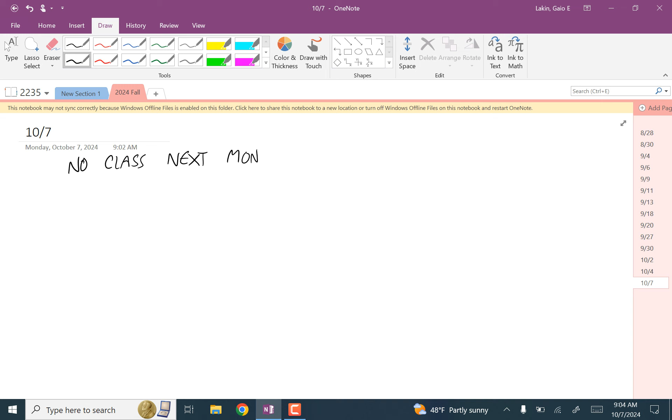One thing I'd like to remind you, maybe especially true in thermo, but in both classes, for these daily assignments I'm giving you half the solutions. So when you go through problems and aren't sure you did it right, please ask me in class and we'll go through it. I'm planning on a chunk of this class being spent going through those problems. And I guarantee questions you have about a problem, other people have questions about it too. So don't worry that everyone's thinking 'oh my God, couldn't do number 7.' Maybe some people aren't nice, but a lot of people aren't thinking that way.

Okay, let's do, well, does anybody have any homework questions? Okay, let's do one more distributed load example problem.

I get number 7. Did I tell you about a friend of a friend who was teaching math at a community college in Michigan somewhere? A person came into his office hours and said, 'I can't do number 7.' He's like, okay, can you show me the problem? The student said no, it's not about this assignment, I can never do number 7, no matter what book, what assignment. And the guy said, 'you can skip number 7s.' That solved the problem.

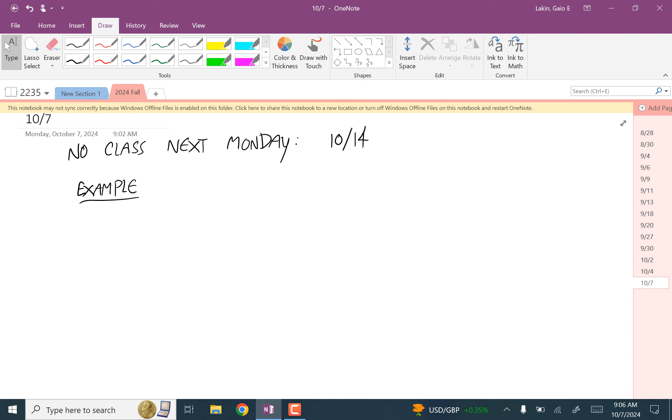Okay, yeah, I have a question. About a distributed load. When it comes to finding the X component, does it matter what you use for the triangle? No, it doesn't matter at all because all of our distributed loads are acting straight down. Actually, it's hard for me to imagine a case where that would be relevant, even if the things were acting to the side.

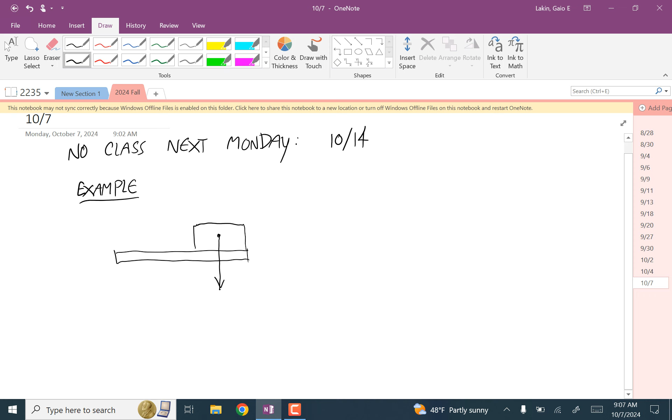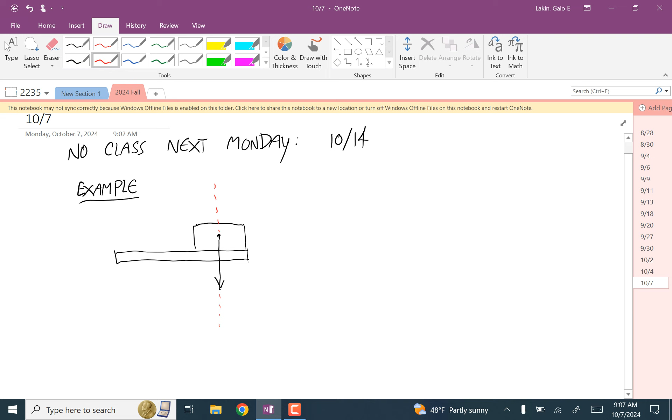So if you have a distributed load like this, and the centroid of that shape is here, this distributed load is acting straight down, which means the line of action is this. So you can move that to any height without it affecting the problem. It's an equipollent system no matter what height you put it at. So no, it doesn't matter.

Does it also change depending on how you define your origin? Well, then based on where your moment point is, you might have to adjust. So we're going to do one right now where you have to fiddle with that a little bit. Let me set that up.

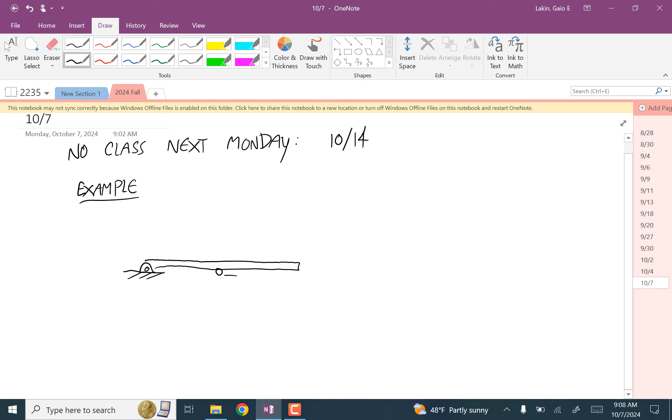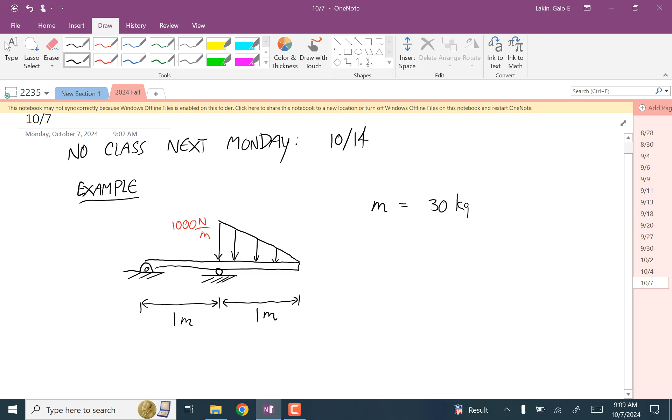So let's say we have a beam, and our distributed load looks like this. Let's say this is 1 meter, this is 1 meter, and the maximum value of that distributed load is 1,000 newtons per meter. And let's give it a mass too, say 30 kilograms. We want to calculate those reaction loads. So, free body diagram.

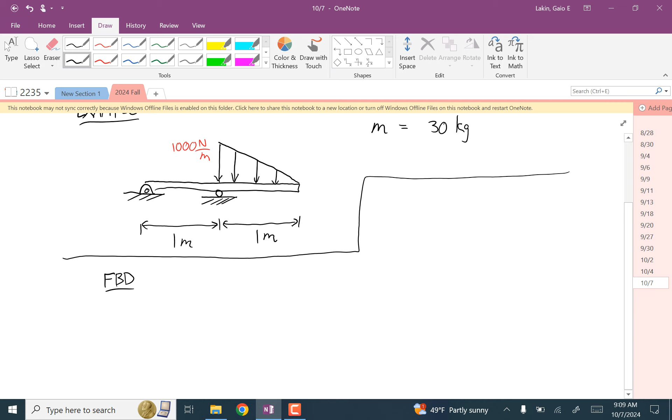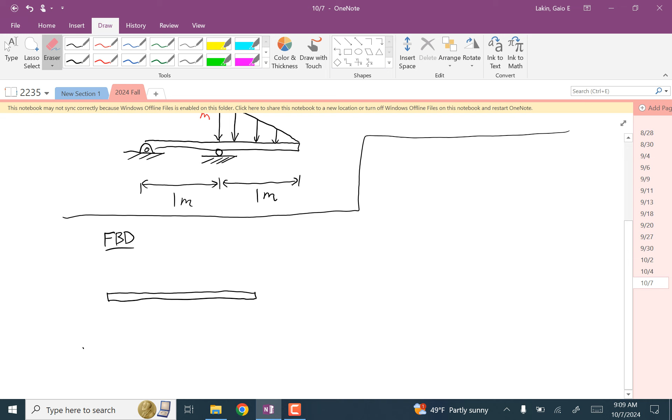At the pin joint on the left, we have a force vector, I'll call that RA. At the center, at the roller, there's an upward force, I'll call that RB. There's a weight acting at the center of mass, that's 30 times 9.81. And then we have this distributed load. And that's a complete free body diagram.

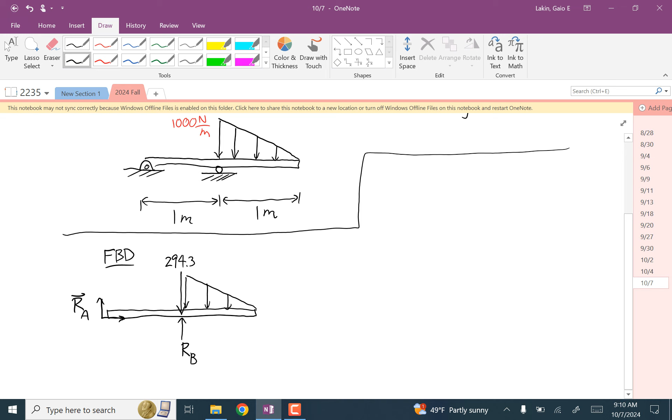So now let's treat the distributed load like a point force. Okay, so we got this triangle.

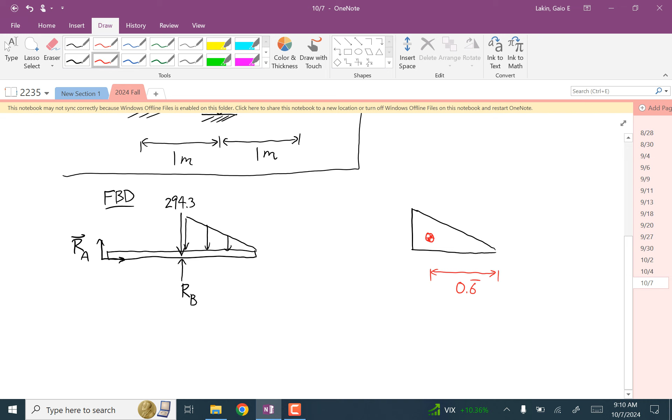The centroid, we don't care about the y location of the centroid, but we know that the whole length of this triangle is 1 meter. So we know this is 2/3 of 1 meter from the point side, so this is 0.6 repeating to the centroid. And we know that the area of this triangle is the height times the base divided by 2, so 500 newtons.

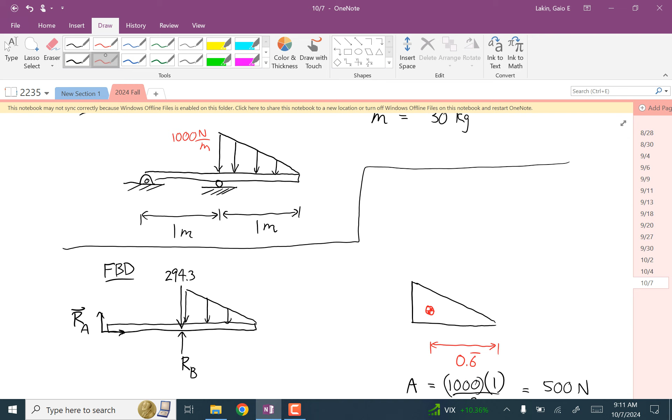But now, like you were just asking about, we know that the distance from the end is 2/3 of a meter, but that's probably not where we're going to put the about point. Let's put it over here, that's where we normally would, and so now we're going to just have to do some subtractions and stuff to figure out what that is.

We know that this distance is not drawn to scale. This is 0.3 repeating. Okay, and so to get from the about point to here, it's going to be 1 meter plus another 0.3.

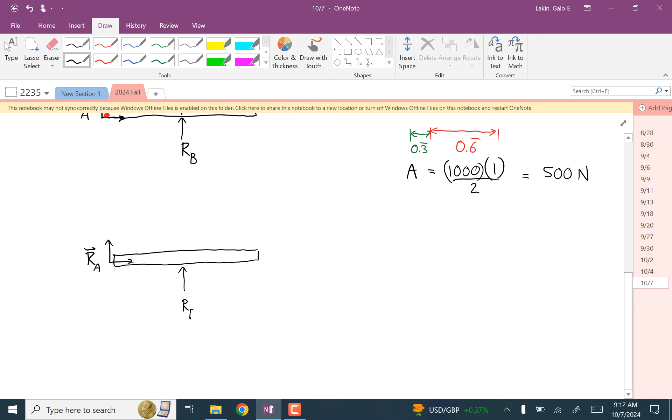And so this free body diagram looks like we have this force vector RA, this is RB. We have a weight force of 294.3, and then we have a downward force here of 500 newtons. And this distance is 1.3 repeating.

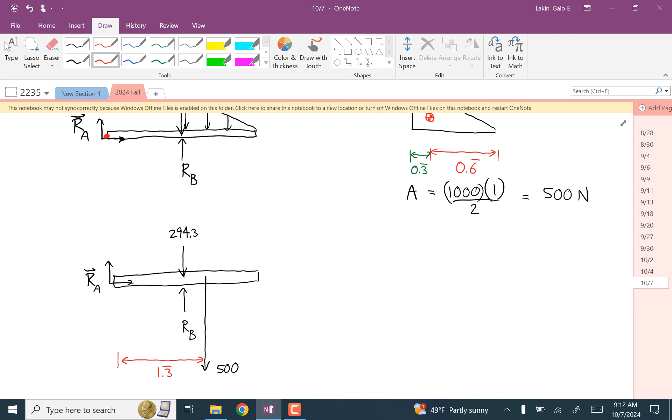Okay, so once you figure out where the centroid is inside of that shape, you're going to have to use that to figure out what the distance is from whatever your about point is. Now at this point, you always can write out a table, and I think it's safe to say that in this class on tests, you'll have time if you want to go through the table, that's fine. I tend to think of these horizontal beams just in terms of distances and stuff, so I guess that's what I'm going to do here.

So Newton's second law says RAX, RAY plus 0, negative 294.3 plus 0, positive RB plus 0, negative 500 is equal to zero. And so right away we know that RAX is 0, there's nothing happening horizontally there. And then the second equation says RAY plus RB is equal to positive 794.3.

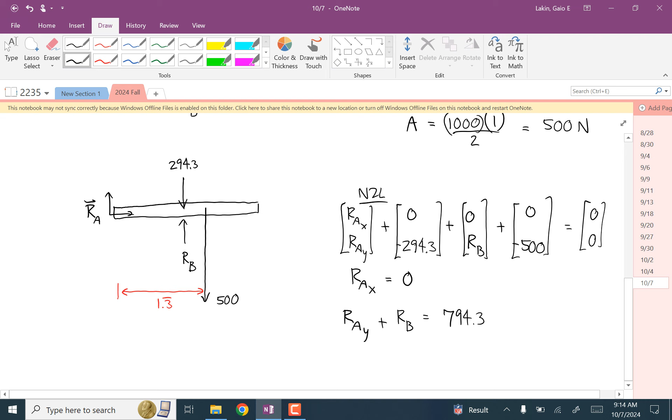And then the moment equation, my about point is here, so we have nothing from the force RA. It's 1 meter from the about point to both of these two, the 294 and the RB, so we have plus or minus 1 times RB. That's drawn positive, so would a positive, upward force RB make this rotate clockwise or counterclockwise around that about point? Counter, yep, so that's positive.

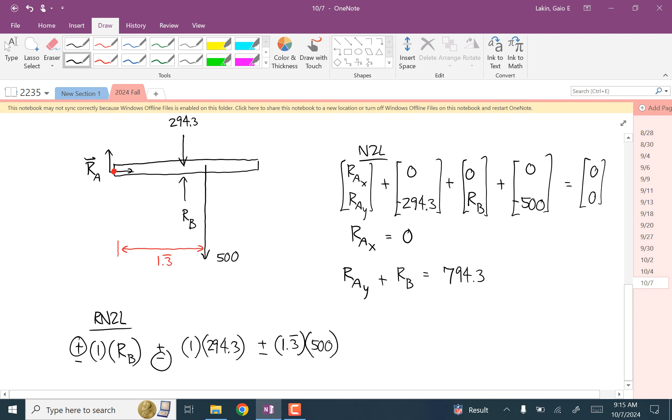And then we have plus or minus 1 times 294.3. Would that downward force make it rotate clockwise or counterclockwise? That would make it rotate clockwise if you're just imagining it rotating around that hinge, and so that's negative. And then plus or minus 1.3 repeating times 500. Would that downward force make it rotate clockwise or counterclockwise? Clockwise, so that's also negative.

For RB, is there any benefit to not always trying to figure out which direction it should be going, just always pick positive according to the coordinate system? It is kind of helpful to do that. And later on, when we're doing internal loads a lot, we're always going to put it all the way at the left like that. So can you say that again? Put what? I'll put the... Just always, I think what you're asking is always put the about point at the far end like that. No. Oh. When you're trying to figure out which direction RB should be going, just always pick positive, and then if it's negative, it's going in the opposite direction of the coordinate system.

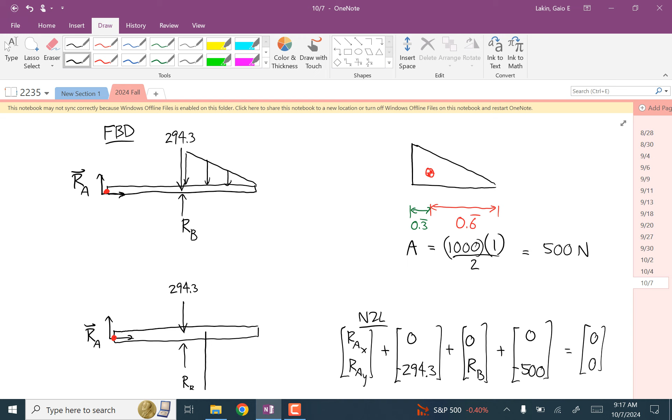RB? Yeah. Did you say like whether that's going up or down? Yeah, when you're trying to figure out what sign it should be, just always pick positive, and then it's matching the coordinate system, you get to just use whatever sign you want. I would say, I mean, that's a roller, and a roller is just always pushing towards the body, so that's how I know that it's going that way. And so then I know that this answer should be positive.

I know that the sign should be positive. I would always do it that way because there's no reason rollers always have to be on a horizontal surface like this - they can be going any direction. So I would just always make it a pushing force toward your chosen body, and then the signs fall wherever they are.

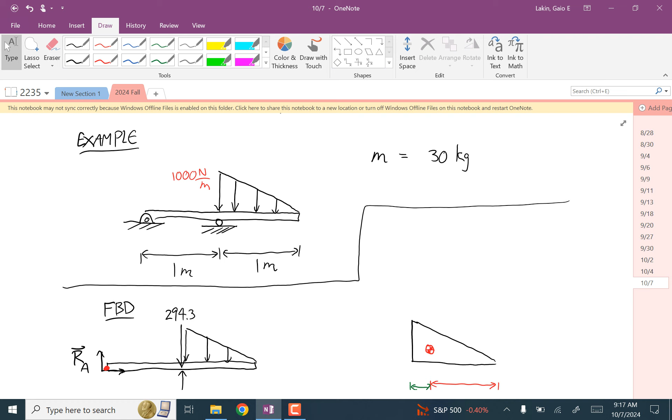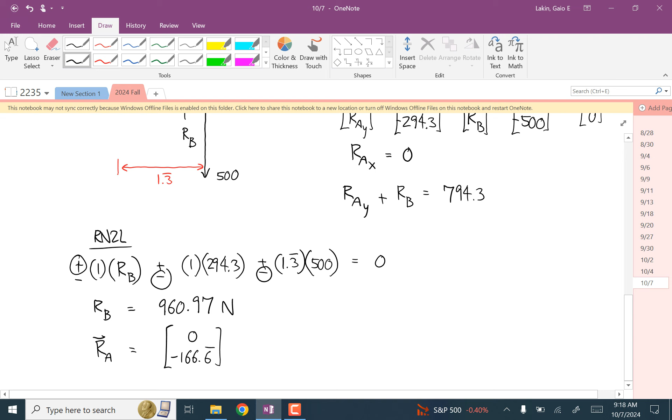Okay, so we got RB, and RA then is equal to 0 for X, and 794.3 minus 960.97, so negative 166.6 repeating. Okay, any questions about that?

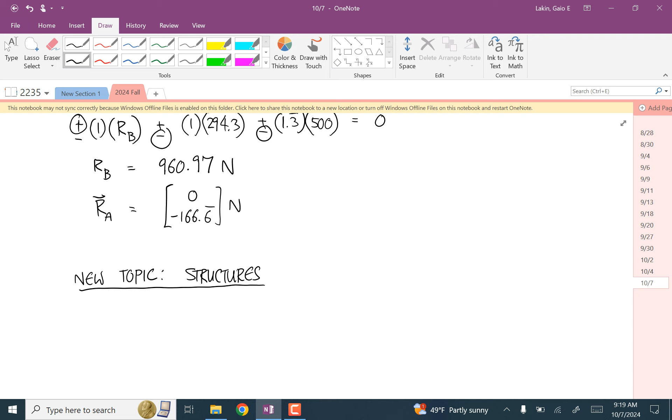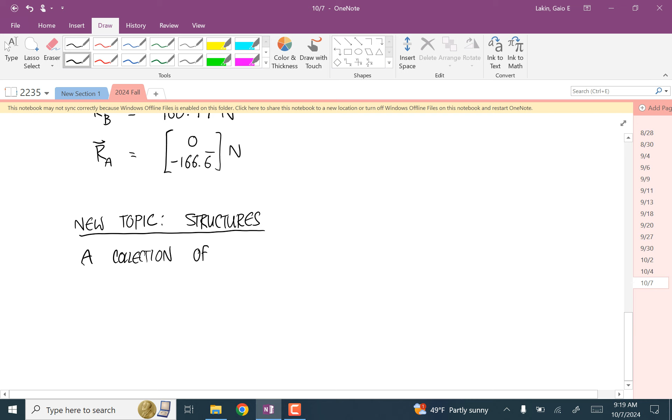Okay, so now we're getting into a new topic, and I consider this to be the heart of this class, the most important topic in this class. This is structures. So now what we're going to do is go from individual rigid bodies and calculating reaction loads to collections of rigid bodies connected by joints and calculating all those reaction loads. So this is a collection of rigid bodies connected by joints in static equilibrium - that's the definition of a structure.

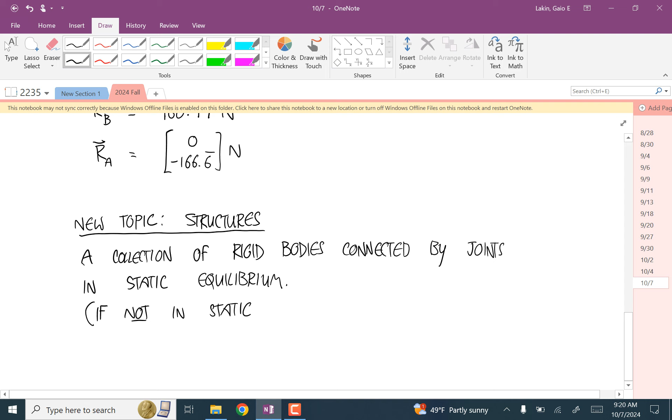So in parentheses, if it's not in static equilibrium, then you're not doing statics anymore - then it's dynamics. And the collection of bodies is called a linkage. So any structure, if you took away one joint, or you took away one ability of a joint to control a degree of freedom, then that structure would be able to move and it would be a linkage.

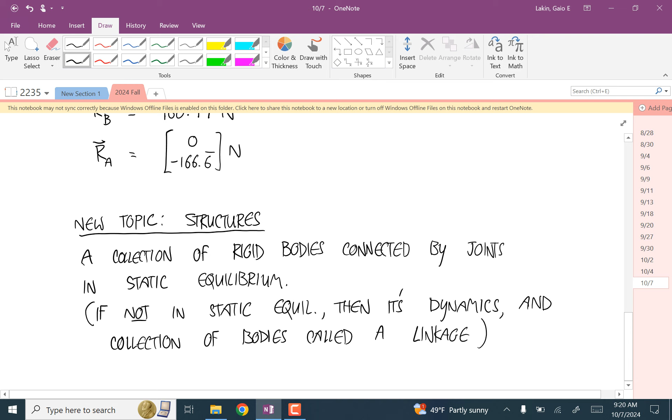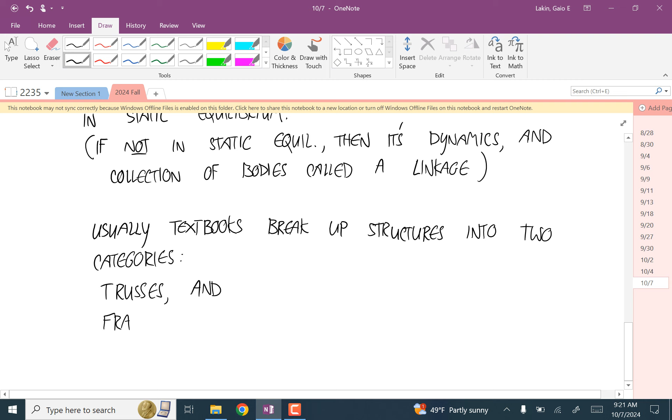So this is something I want you to always have in the back of your mind. We're going to do this a little bit differently than you normally see in statics textbooks, and I think there's good reason for this. But usually textbooks break up structures into two categories: trusses and frames. The mathematical approach is different depending on which of these two you have.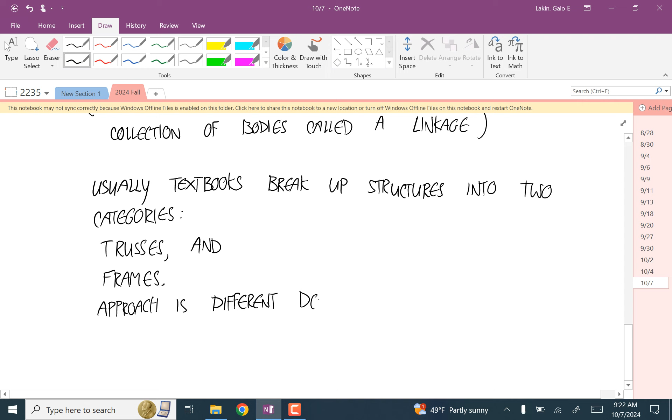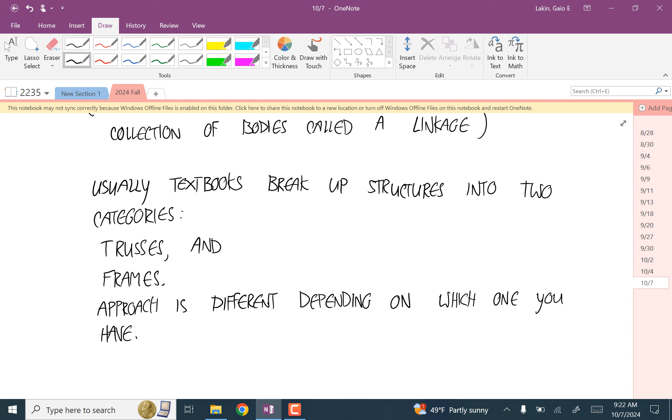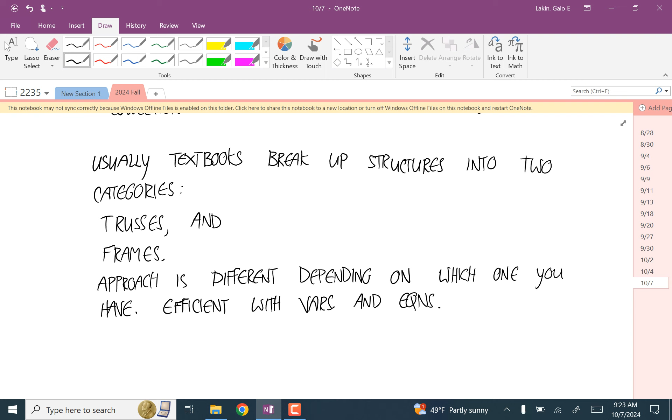Okay, so what's the benefit of doing this? Well, they have very streamlined methods for both of these two things. So especially with trusses, they reduce the number of variables and equations in your system quite a bit by breaking it up this way. So this way of thinking about it is efficient with variables and equations. And like always, like basically everything with statics, we've talked about this a few different times - in the old days, when you were doing everything by hand, reducing the number of variables was really important. But now with this huge amount of computing power on your phones and everything, it just isn't as important anymore.

And so here is what you give up - here are the drawbacks to that approach. So you gain this ability to do things more easily by hand, but the first drawback is you have to categorize the structure you have correctly, or else everything just goes wrong from the start. If you categorize what kind of structure you have wrong, then it's wrong before you even start.

When you say trusses are efficient with the variables, does that mean that you're able to do more problems with it that you wouldn't be able to do the way that you're about to go into? What it means is instead of a system of 15 variables and 15 equations, you have a system of 7 variables and 7 equations, which doesn't matter much to us, but it matters very much if you're doing it by hand through substitution or something - that's what it means.

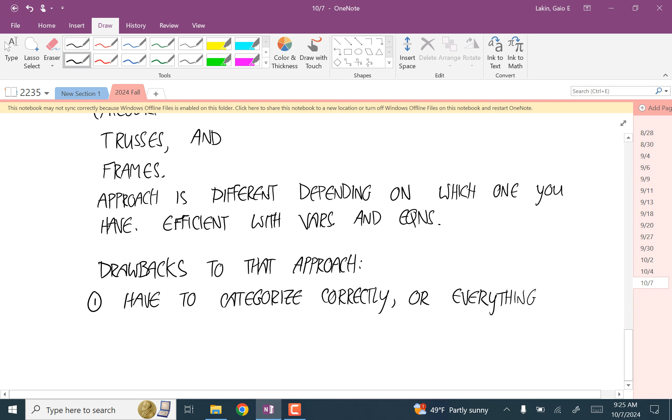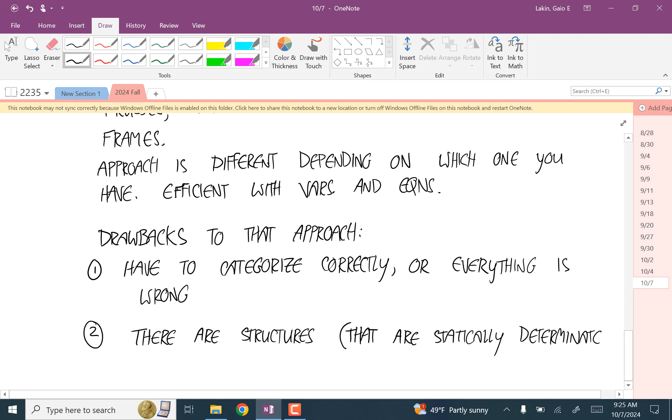Okay, so the drawbacks are if you see something and it's a frame and you call it a truss, you can't get it right before you even start putting any numbers to it - everything is wrong, you can't do it. The second drawback is trusses and frames don't contain every possible structure. So there are structures - and just to be clear, talking about statically determinate structures that can be solved through statics - that can't be solved through either of these approaches.

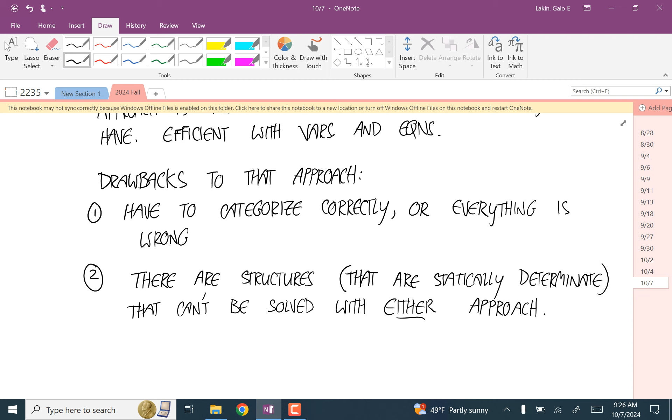Okay, so that's a problem. There's nothing wrong with the structure itself. You can totally solve it through statics, but you'd be out of luck with those two methods.

I'll give you one method that works for every statically determinate structure.

And then I'll go back afterwards and talk a little bit about the truss simplification. It's a nice thing to be aware of, how it works so well. But this is really the thing I want you to get a lot of practice with, this one approach. It's kind of like a brute force approach. You get more equations, more variables, but you can solve it easily on your calculator, and there's nothing you can't solve with it, and you don't have to worry about categorizing and all this stuff.

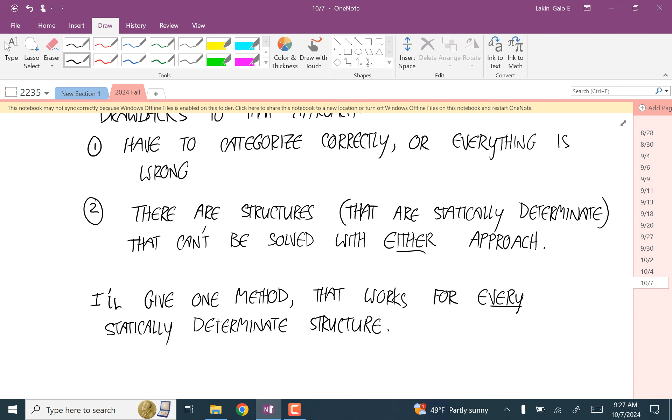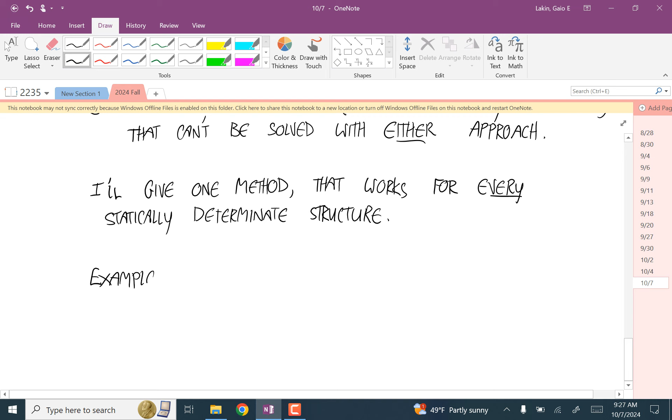So I'm just going to start with an example, and we're just going to kind of think our way through this.

So let's think of a structure made out of two bodies, the simplest structure you could have. Each of these two bodies is connected to the ground by a pin joint, and they're connected to each other by a pin joint. So we have a pin, and a pin.

This is as simple as you can imagine, but I'm going to do one that isn't a frame or a truss right off the start. I'm not even putting any applied external loads on here, I'm just going to say each one of these two things has a weight.

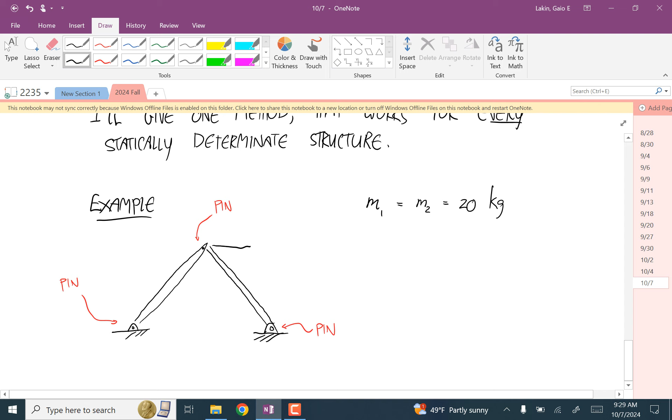Yeah, I guess I'll put one external load here. Let's say we pull on it this way with 600 newtons. Okay, and we want to calculate the reaction loads at all of these joints.

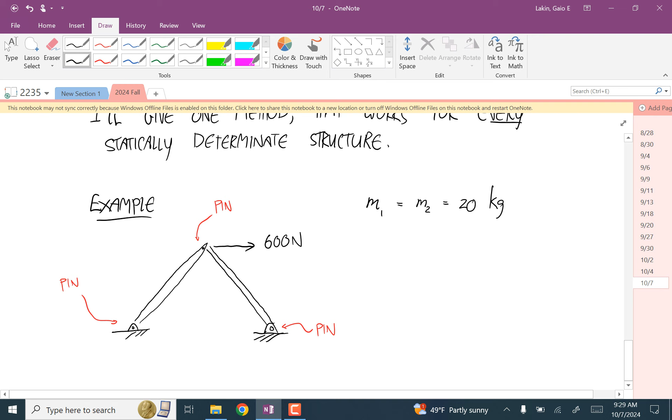And this is not a frame or a truss. So as simple as this is, using the two approaches that you would find in statics textbooks, you couldn't do this. But clearly it's a very simple problem, not a complicated one.

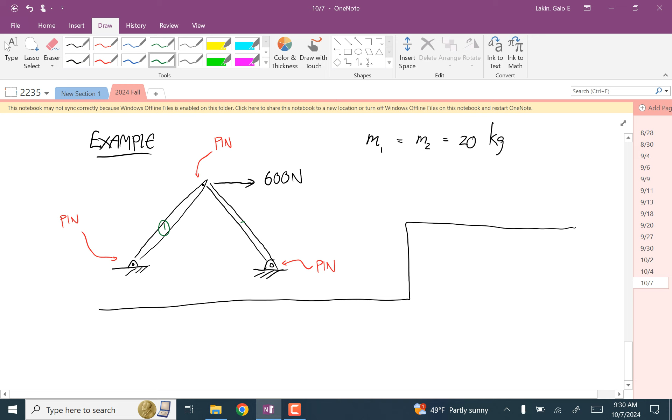So just for reference, I'm going to call this body 1 and this body 2. Let's think about how we would do this. And I'm going to name these joints too. Let's call this pin 1, this pin 2, and this pin 3.

So the first thought we would have is what are the different moving parts. We have a pin down here at 1, a member here, member 1, a pin here, a member here, and a pin at 3.

And the loads that are happening, so think about what's in contact with what. The pin is in contact with the ground, right? It's in contact with that bracket. So we have some force vector here, and I'll call that the force on the pin by the ground.

Okay, we're going to be using that double subscript notation all the time now. So remember the first one is what the force is on, the body it's acting on, or you can also think of that first subscript as what your free body diagram is of. And the second one is what's applying that force. And we're ignoring the mass of that pin.

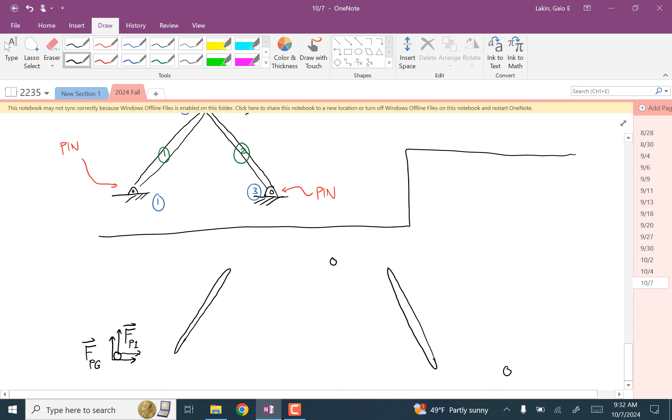We would treat this as a particle. We don't control its orientation. It could spin in there and it would still support the loads just fine. So all we would have here are two equations from Newton's second law.

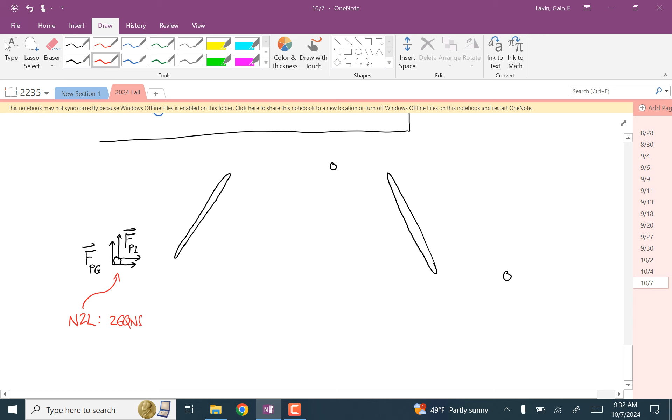Okay, now we go to the rigid body here. What loads are acting down at the bottom of member 1? Might it be just minus FP1? Yeah, that's perfect. So this is the force on 1 by the pin, or negative FP1.

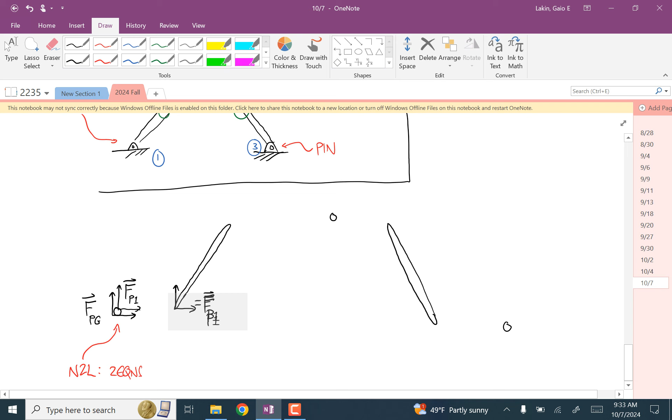And then there's a weight force acting at the middle. I said that these each have a mass of 20, so this is 196.2 down.

And then what about at the top? What force is acting on member 1? So I called that pin... you know what, sorry to do this to your notes, but I'm going to call this pin A, pin B, pin C.

If you want to redraw this, I'll give you time here. But this is the force on pin A from the ground. This is the force on pin A from member 1. This is negative FA1. Yeah, that'll work better.

And now up here at the top, we have the force on member 1. This is the force on body 1, so F1 by pin B. Would FA1 and FAG be equal and opposite? Yeah, they're equal and opposite, but we don't have to even notice that yet because that's just going to come out in Newton's second law. Would it be better to write it as negative FA1? No, we're just going to write out everything we know, and then we're going to go to the equations and solve this big system of equations.

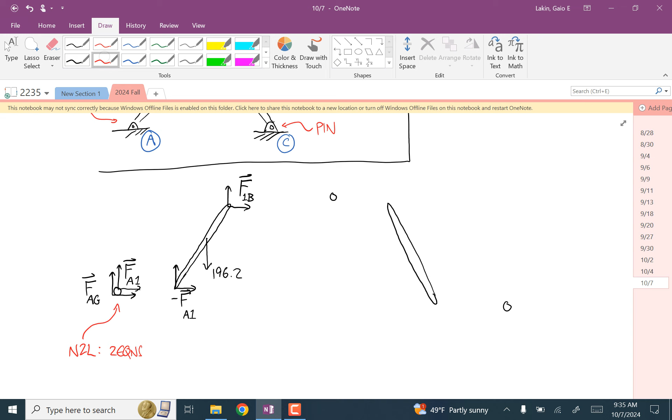Is there anything else touching body 1? I'm assuming that 600 Newton force is acting on the pin, so I'm going to say it isn't acting on this. Okay, so that's it for this one. This is a rigid body, not a particle, so this gives us Newton's second law and rotational Newton's second law. This is a 2D problem, so that's 3 equations.

And now we'll go to pin B. What forces are acting on the pin B? Negative 1B, and 600 Newton to the right. And we call it FB2, force on B by body 2. And how many equations are we going to get from this one? 2, yep, that's a particle, so we just get Newton's second law. That's 2 more equations.

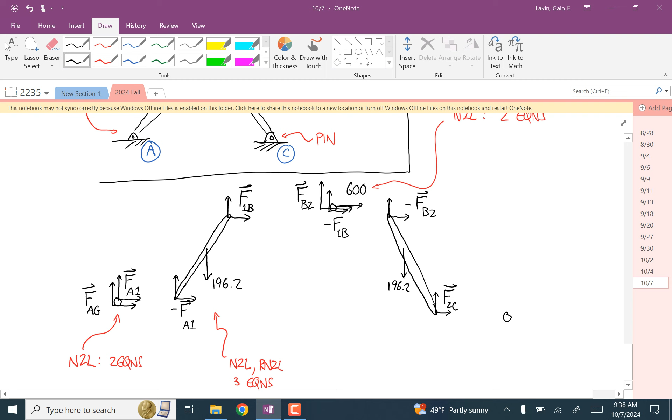And now body 2. So we have the weight force, 196.2. What do we have up at the top here? Negative FB2. And what do we have at the bottom? Force on 2, because we're looking at body 2, C. And the idea here is that the pin isn't touching the ground. Body 2 isn't touching the ground, I mean. Okay, so this is it.

And how many equations do we get from this? 3, yeah, so we got Newton's second law and rotational Newton's second law, and that's 3 equations. And then the last one is pin C. What forces are acting on the pin? Negative F2C, FCG, and FCG. And how many equations do we get from this? 2. Yeah, 2 equations. Okay, so let's think about how many variables we have.

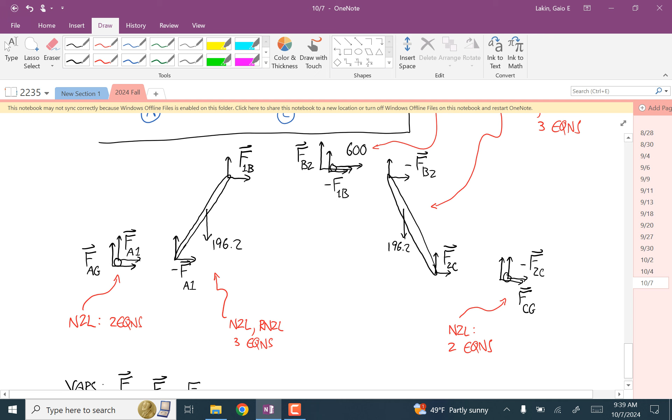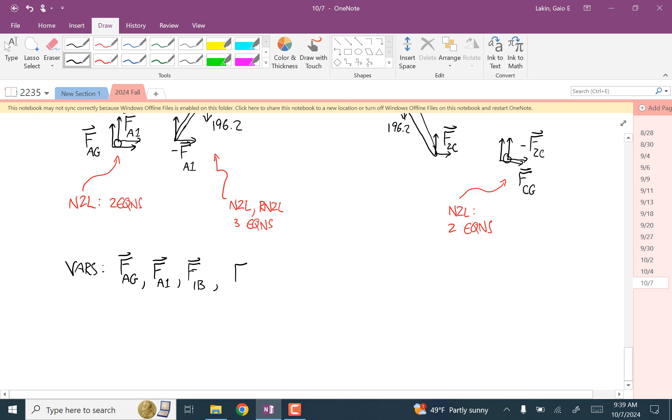So the variables are F on A by the ground, F on A by 1, F on 1 by B, F on B by 2 - we already have 1B - F on 2 by C, and F on C by G. Okay, so 2, 4, 6, 8, 10, 12 variables. And how many equations? 5, 5 and 2, 12 equations.

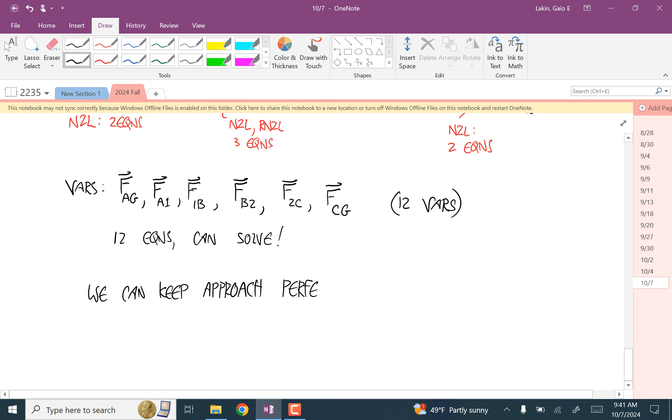Okay, but that's a lot of variables and a lot of equations. So right from the start, I'm going to tell you a way that might not occur to you right off the bat, but you can always make the following simplifications. We can keep this approach completely general, perfectly general, and simplify what we did above. So here's what we're going to do.

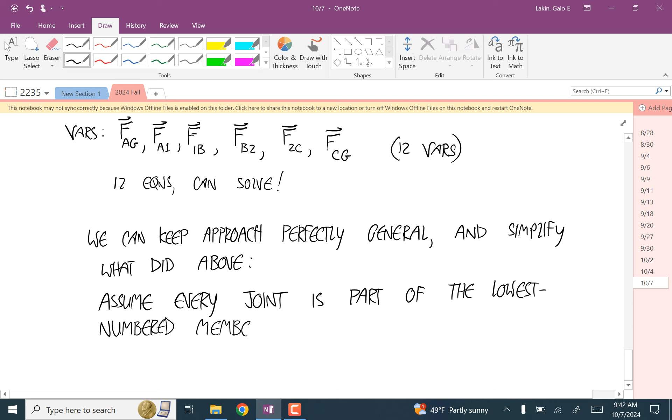Assume every pin - and actually we'll do some that aren't pins, other kinds of joints - so we're going to assume that every joint is part of the lowest numbered member it touches.

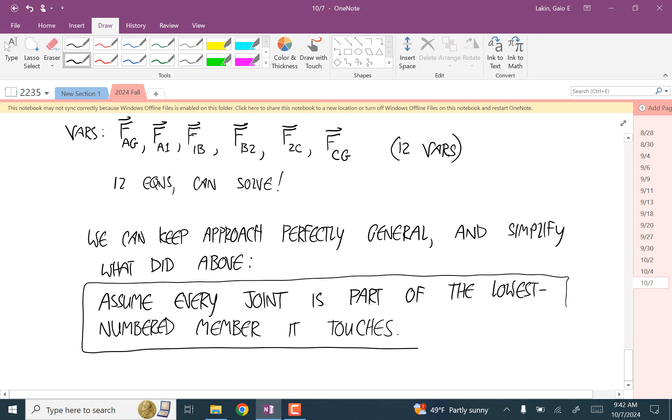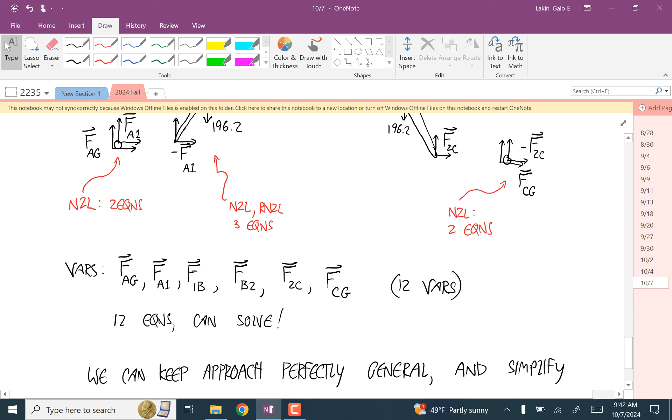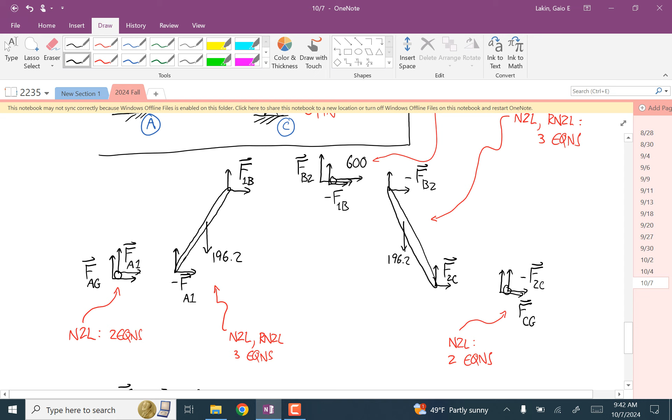So let's go up above and figure out, at each point, what the pin is going to be connected to. You can always lump bodies in with each other - you do that all the time, since everything we deal with is made of atoms and you just lump them all into one thing. So we're just doing that here, lumping the pin in with one of these bodies that it touches. So this pin A would be part of member 1.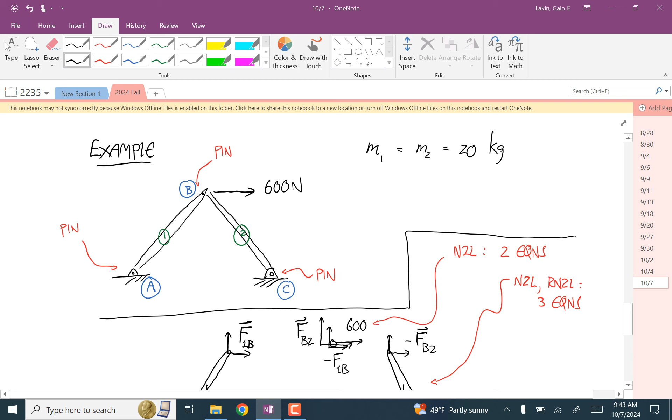What about pin B? It's touching 2 rigid bodies - are we going to assume it's part of member 1 or part of member 2? 1, that's the lowest numbered member that it touches. And then C, what body is that going to be attached to? 2. Okay, so let's do it.

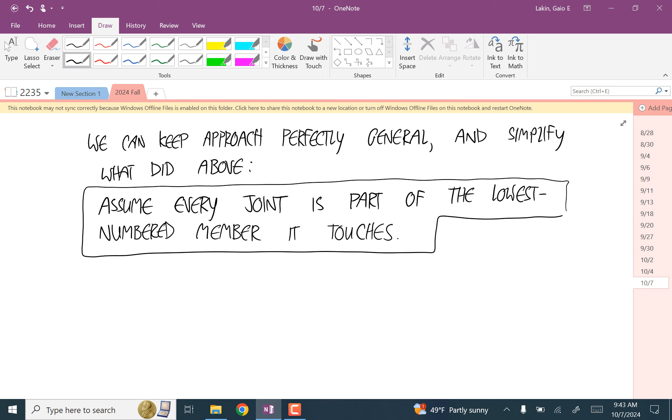So let's do it again with this approach. And by the way, the lowest numbered member thing is just bookkeeping - it's just to make sure you're not double counting forces. This would work perfectly well with the highest numbered member or the lightest colored member or whatever, as long as you just have a way to lump it with one thing and not the other thing.

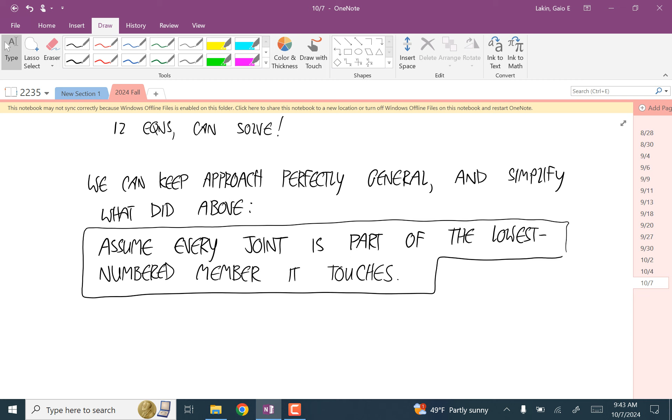I just want to point out that you could have numbered these totally differently. Someone who numbered these rigid bodies differently would connect different joints to different bodies. Things would look different throughout the problem, but at the end, you'd get the same answers.

Okay, so... but that makes grading just a blast.

You're right that early on was a major issue, so I started telling people, use this numbering, please.

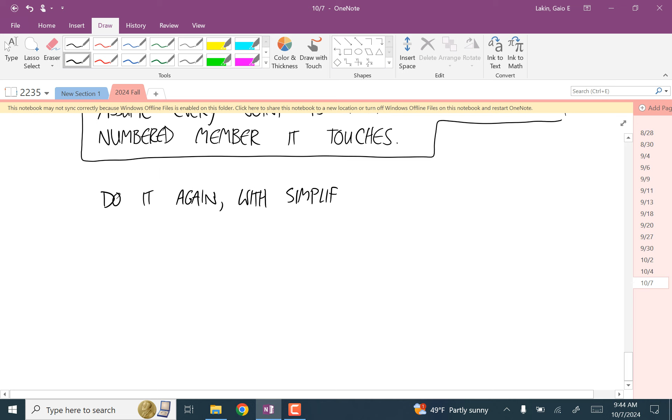So we're going to do this again with the simplified approach. I guess we won't be able to do the numeric part yet, but we'll do that next time.

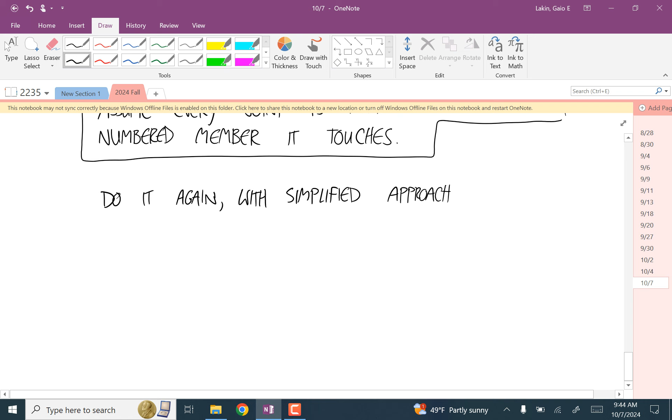This time the pins are all part of a rigid body. So I'm going to start with a free body diagram of body 1.

The force between the pin and member 1 is an internal force, so all we care about is the force that the ground applies to the pin. I'm going to call that the force on body 1 by the ground, or we can also just call it some reaction force, because we're never going to isolate the ground.

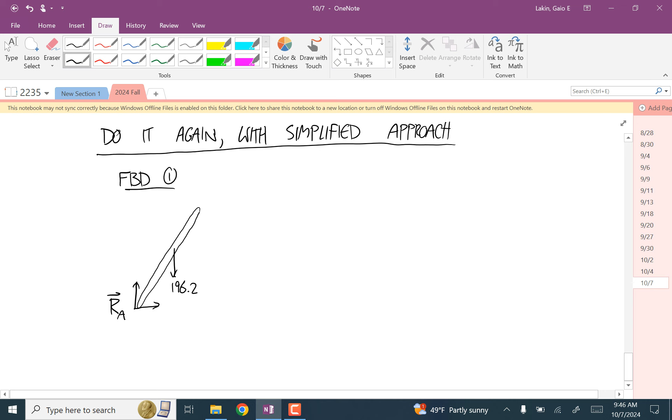And then you have the weight force. Up here, the question is what external objects besides body 1 make contact with the pin. Body 2 - so there's a force on 1 by 2. And then there's one other force applied to the pin, the 600 Newton force.

This is a rigid body, so how many equations do we get out of this? Three.

And now we'll go to the second body. Remember that the second body doesn't have the pin attached to it.

That 600 Newton force is applied to the pin, not to body 2. The only thing that body 2 touches is the pin. So here we have the force on 2 by the pin, which is body 1. So the force on 2 by 1 is negative F12. And that's it there.

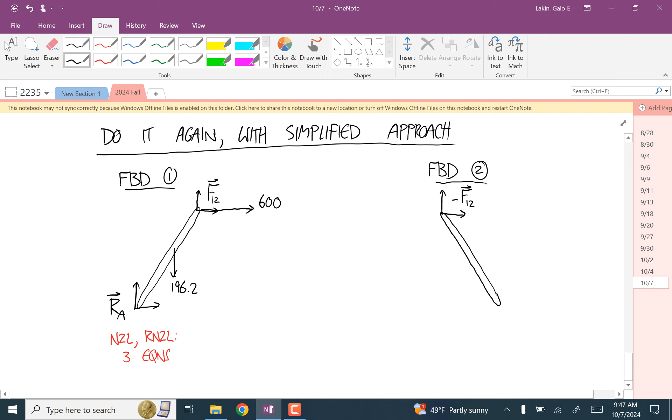Any questions about that? Why doesn't 2 need contact with the ground? That's just at the top joint - you're right, I'm not done yet. So we still have the weight, 196.2 there, and yes, there's contact with the ground.

So down here, I'll just call that - you could call it the force on 2 by the ground, but I'm just going to call it RC. The only reason we need the subscript notation is to go from one body to another. With the ground, you never care about that, because we never isolate the ground.

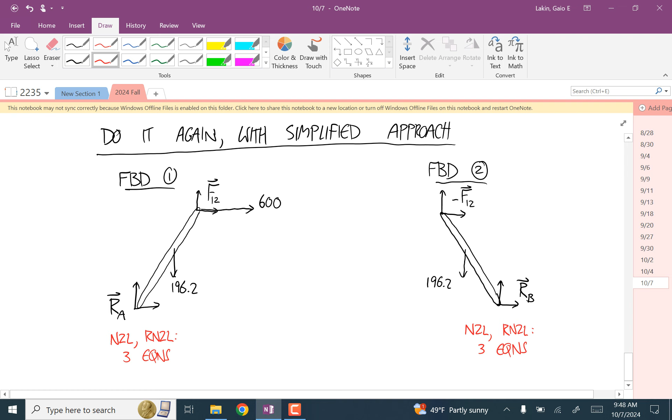And how many equations do you get here? Yep. So 6 total equations. Can we solve it? We have 2 variables here, 2 more, 4, 2 more, 6. So 6 equations.

6 equations, 6 variables. And so you can solve this.

This way of doing it is pretty streamlined. It's the most streamlined you can make it with a total general approach, as far as I've ever figured out. It's way better than before.

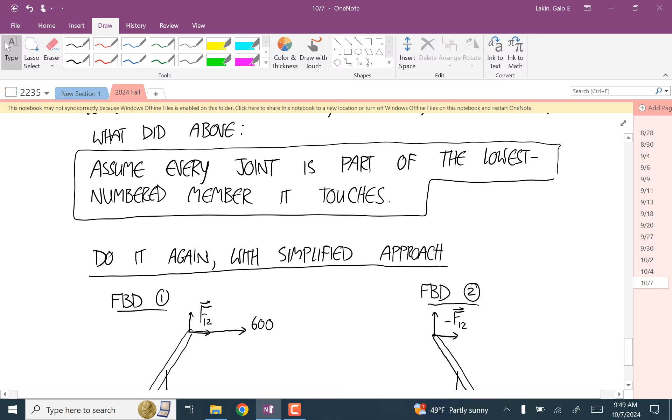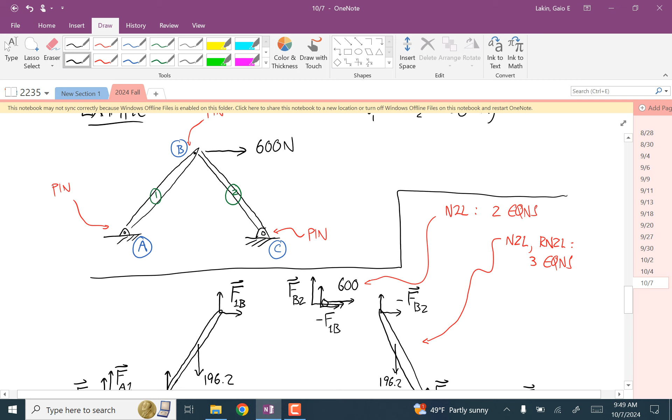It turns out that, like I said, this is not a truss, so you can't use either the truss or frames approach to do this. If you did it without the weights - if you were able to neglect them because say you had weights way smaller than that 600 Newton force - then this would be a truss. You could solve it with the truss approach. With this method, it would still take 6 equations and 6 variables.

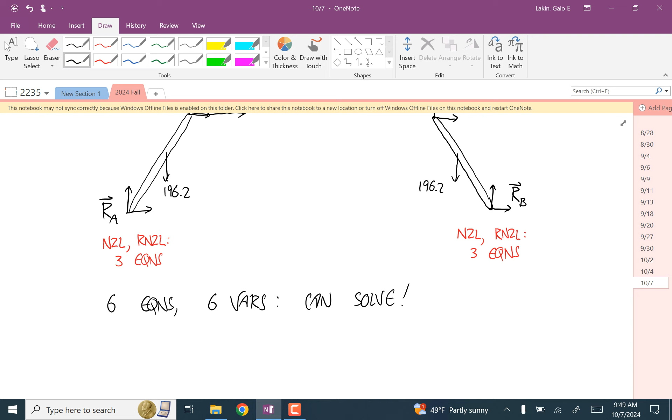With the truss simplification, you could do it with 2 variables and 2 equations. That gives you a sense of how helpful that simplification can be in some instances, but this isn't so bad - 6 and 6 isn't so bad.

Anybody have any questions right now? I think I still have some distributed load problems I can give you, so I don't think I have to give you any structure problems yet. On Wednesday, I'll finish this problem. We'll do some more example problems and keep getting used to this approach. Okay, that's all.